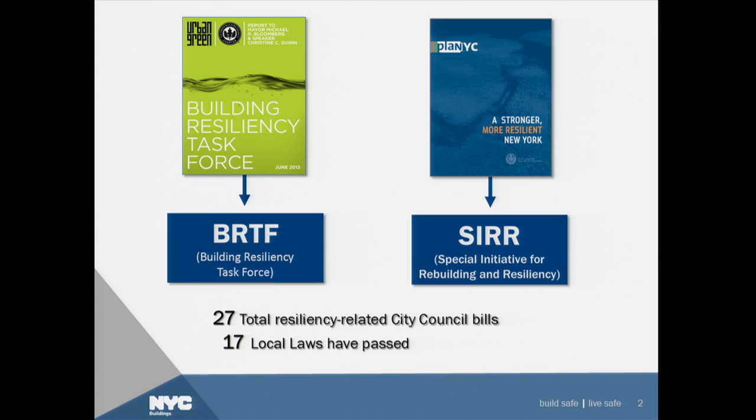So there's a lot of local laws to come, I would assume. There are 27 total resiliency-related city council bills. Of them, 17 local laws have passed. And of those 17, roughly 9 have some impact on Appendix G. So I'm going to be discussing 8 of those local laws.

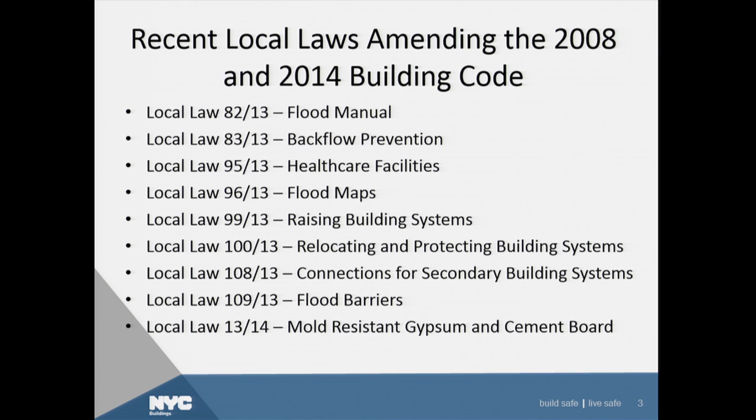Local Law 82 of 13, I'm not going to discuss at length, but just know that the department is required to author a flood manual, which will summarize all of the construction provisions for construction in a special flood hazard area. That's forthcoming.

Local Law 83 of 2013. Now, a lot of these local laws are accentuating provisions that are already in the books. This particular local law is one of them. For construction in a special flood hazard area, it was always required that a backwater valve be provided, but in many instances it was overlooked because there wasn't a specific reference in the plumbing code. So a plumbing designer or a plumber looking in the plumbing code wouldn't know to look to Appendix G or ASCE 24 for specific provisions related to backwater valves.

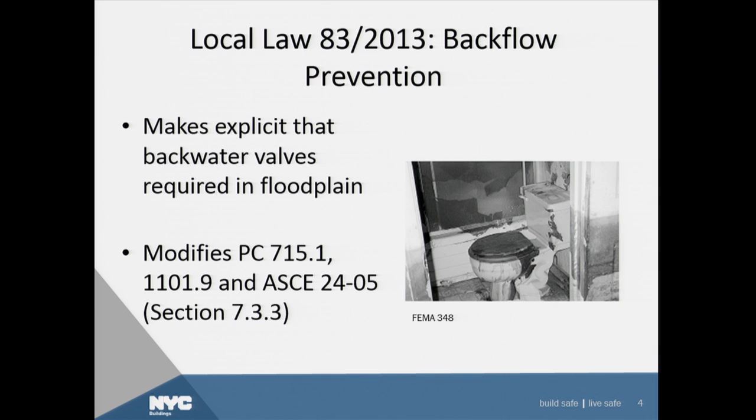So this particular local law makes explicit that backwater valves are required in the floodplain. It also makes explicit that buildings located in a special flood hazard area connected to a public sewer are subject to surcharge—that's the reason for requiring these backwater valves. Also keep in mind that individual private sewage disposal systems are also required to provide backwater valves, so that during a flood event the system won't discharge sewage into the flood waters, and also that flood waters won't make their way back into the building.

Local Law 95 of 13 addresses patient care areas, introducing a new definition of patient care areas for flood zone purposes. That definition defines patient care areas as spaces located within a building or portion thereof classified as Group I2, or spaces primarily used for the provision of medical services to persons—consultation spaces, treatment, evaluation, monitoring. The way it amends Appendix G, it treats these spaces as though they're residential for flood zone purposes, mandating that they be elevated above the design flood elevation. You're not permitted to dry flood-proof these spaces.

There are exceptions to these patient care areas, and the exclusions include emergency departments and spaces with specialized equipment. For obvious reasons, emergency departments you want to have at ground floor so that emergency personnel can deliver persons at ground level. And in many instances, specialized equipment is best suited below grade. So that's the reason for the exclusions.

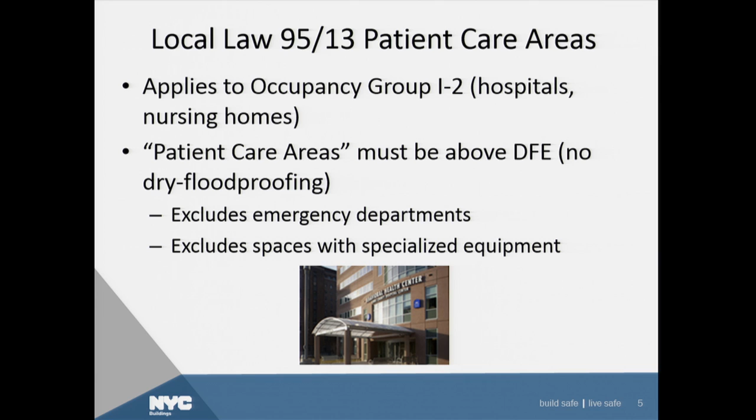Local Law 96 of 13. I know we did a whirlwind tour on the resiliency-related local laws—Gus, myself, and James Colgate—about a month or two ago, where we discussed a lot of these, so this may be redundant for some of you, and I know many of you are already familiar with Local Law 96 of 13, but just to reemphasize this point.

There's been so many different types of mapping products released by FEMA—the advisory maps, the preliminary work maps, now the preliminary flood insurance rate maps. So there's so many questions as to what maps do I use, which ones are applicable to my particular project. This Local Law 96 of 13 adopts the preliminary flood insurance rate maps into Appendix G, making it clear that these maps must be followed when filing a building in the special flood hazard area.

Now, we can't just yet forget about the effective maps from 2007. Until FEMA releases their final version of these preliminary flood insurance rate maps—their effective FIRMs, whatever that may be, effective FIRMs of 2015—we still have to refer to both sets of maps.

Of particular interest for this slide, you can see we're looking at a small portion of a panel. There are roughly 340 flood panels in New York City. This is for an area in Staten Island called Wolfe's Pond. If you look on the left-hand side, the effective FIRMs from 2007 are showing a VE zone in some of the residential neighborhood there, which would require elevating a building on piles. Whereas on the right-hand side, the preliminary flood insurance rate maps from December 5th of 2013 are showing that same area in an AE zone, which would not require a pile-supported foundation.

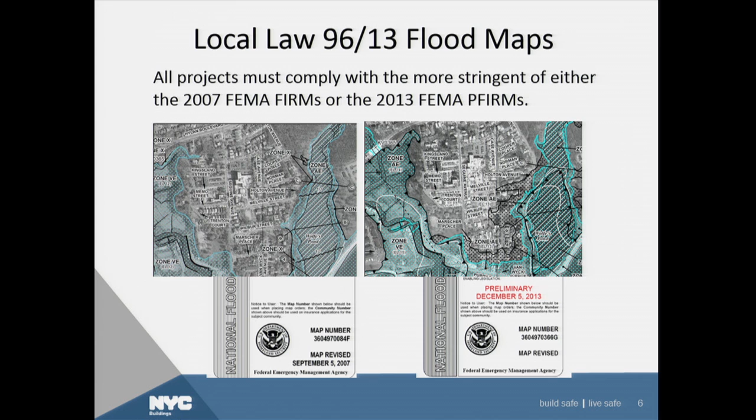Local Law 96 of 2013 also changed the city datum. Previously, the city datum was NGVD of 1929, the National Geodetic Vertical Datum of 1929. Now all elevations must refer to the North American Vertical Datum of 1988. This is consistent with the flood insurance rate maps, and it's effective for new projects submitted on or after January 6th, 2014. Keep in mind this applies regardless of whether your project is located in a special flood hazard area or not. So we've effectively changed the city datum, and it applies to all projects.

Now, if you've previously submitted documents prior to the effective date of this law, and they were in a different datum, you could submit the final surveys or amended surveys in the reference datum that you previously used.

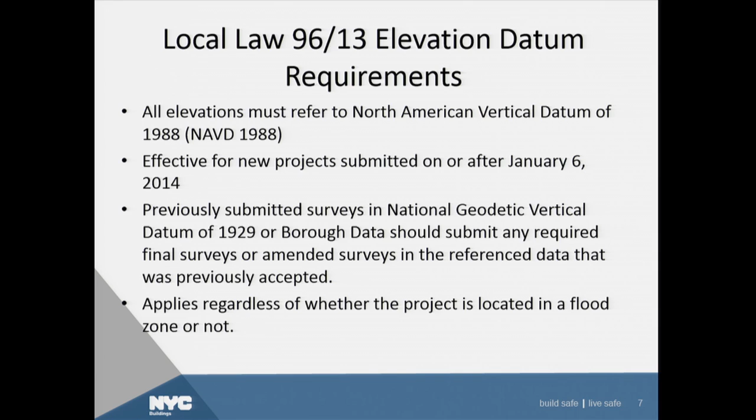Local Law 99 of 2013 deals with cable length and fuel oil storage. Electrical work was always required to comply with ASCE 24 if performed in the special flood hazard area. But electricians looking in the electric code never saw a reference to ASCE 24, Appendix G, or the building code, so they didn't know there were specific provisions. So here we're also making reference in the New York City Electrical Code to make explicit that flood requirements are applicable. They were always applicable, but this local law is amending the electric code to make that clear.

Unlisted entrance cables: this permits unlisted conductive and non-conductive outside plant optical fiber cables entering buildings to exceed 50 feet, to allow direct delivery above the DFE. Keep in mind these particular types of cables are not permitted to be run in ducts or plenums that deliver environmental air.

The fuel oil storage limitation was slightly increased. It now permits 3,000 gallons of fuel storage on the story above the DFE. Previously that was 330 gallons. Now, keep in mind there's a limitation of 1,500 gallons per tank, so you can have 2 tanks of 1,500 gallons, and there are stringent vault requirements for which each one of those tanks must be enclosed in.

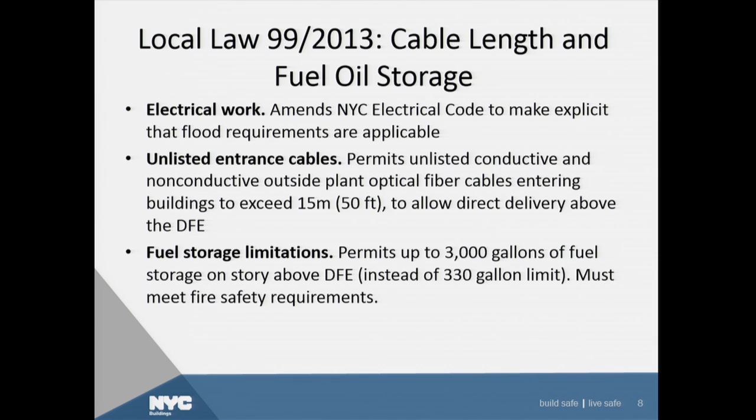This is Local Law 100 of 2013, and it has a fairly significant impact on the location of fire protection equipment. Previously, the practice has been: if you have a dry flood-proof building, non-residential for flood zone purposes is permitted to have dry flood-proof enclosures, and you can locate some of your equipment below the design flood elevation in these dry flood-proof enclosures.

This local law changes that fact, and states that certain fire protection equipment - pumps, electric valves, certain alarm components - must be elevated. Even if you're a non-residential building, these particular pieces of equipment must be elevated above the design flood elevation. Certain storage is no longer permitted within dry flood-proofed enclosures, including medical, compressed or flammable gases, and hazardous materials. They must all be elevated.

Fuel oil fill and vent outlets must be elevated 3 feet above the design flood elevation. Design flood elevation is equal to the base flood elevation plus any required freeboard. So if you were required to have 1 foot of freeboard, this would now be base flood elevation plus 4.

Hospitals, that's I2 occupancy, in the 500-year flood zone must design to the 0.2% flood elevation. So hospitals located in the 500-year flood zone must also comply with the AE standards and be elevated to the 0.2% flood elevation. Or if the hospital is located in an AE zone, they must compare the 100-year flood elevation to the 0.2% flood elevation and use whichever is higher.

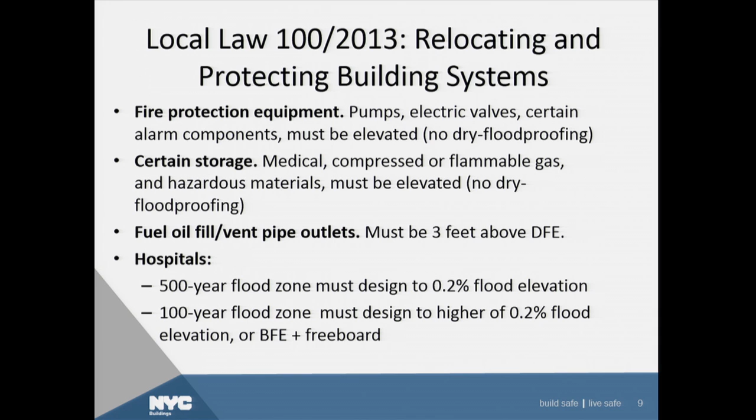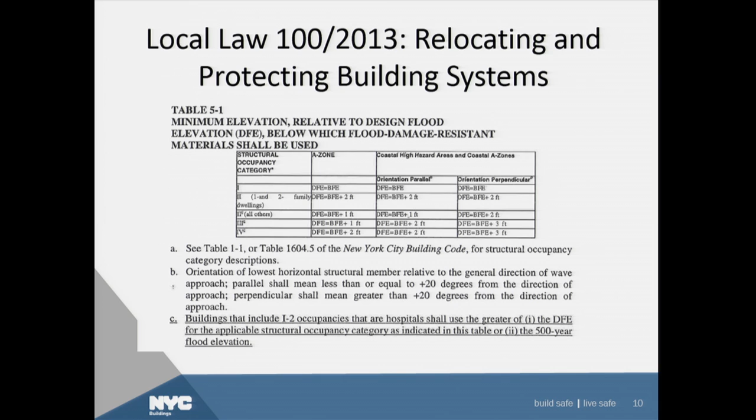Keep in mind this footnote has been added by Local Law 100, and if you look in Local Law 141, you may not see this footnote now, but once the actual building code is printed, you'll see this footnote. I'll make reference to this table again later in the presentation, and you won't see that footnote there - sometimes these local laws don't necessarily show up in Local Law 141.

So this was already mentioned by James Colgate in his presentation. This is a retroactive compliance by 2033 requirement, and it has 2 different compliance paths. One, which he previously mentioned, is using temporary connections to meet the requirements of this local law. And the other, which this particular slide is presenting, is elevating your equipment above the design flood elevation.

For this local law, generators in hospitals must power certain emergency, standby, and heating and cooling loads for 72 hours, and they're permitted to be connected to natural gas, or you can provide temporary connections that will receive power from a temporary generator. I think what we're trying to drive home here is that relocating your generator, which most building owners are going to do because it's a far more resilient measure, is a better idea than providing a temporary connection. However, you can meet the retroactive compliance requirements by simply providing a temporary connection.

For hospitals, it's also necessary that generators and heating and cooling plants must be above the design flood elevation. They're not permitted to be dry flood proofed unless temporary connections are provided. So the temporary connections can be provided, or you're relocating this equipment above the design flood elevation — not permitted to be dry flood proofed for hospitals.

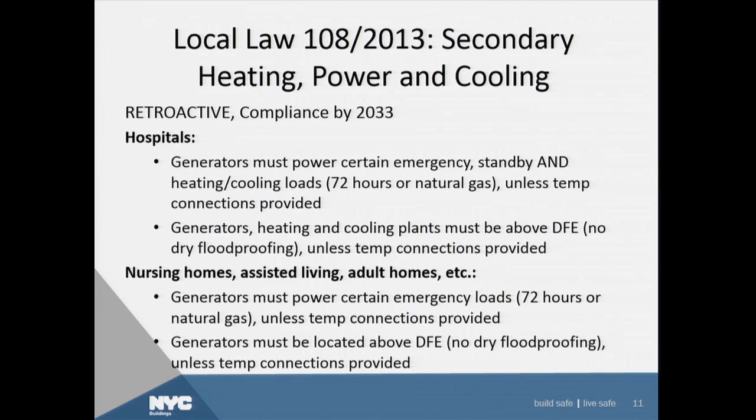Now, for Local Law 109, this clarifies that it's always been a building code requirement that for buildings that are dry flood-proofed, non-residential, for flood zone purposes, when you're deploying shields and gates and blocking means of egress, ASCE 24 requires that you must provide an alternate means of egress for the blocked means of egress.

Now, we've gone a step farther here in New York City, and we've amended ASCE 24's provision to state that every required blocked means of egress must be provided with an alternate means of egress immediately adjacent to that blocked means of egress, which is a significant requirement that's often overlooked during the design phase and has to be dealt with when objections are raised. So this local law clarifies that this blocked required means of egress has to be provided with an alternate means adjacent to and above the DFE.

Now, this local law also permits buildings located in the 100-year floodplain and 500-year floodplain to install footings and supports for temporary flood shields, stairs, and ramps a limited distance beyond the street line. That limited distance is 12 inches. It's not a lot, but it's something. Anything beyond that requires DOT approval, and they're in the process of writing a rule on exactly how revocable consents can be gotten from them.

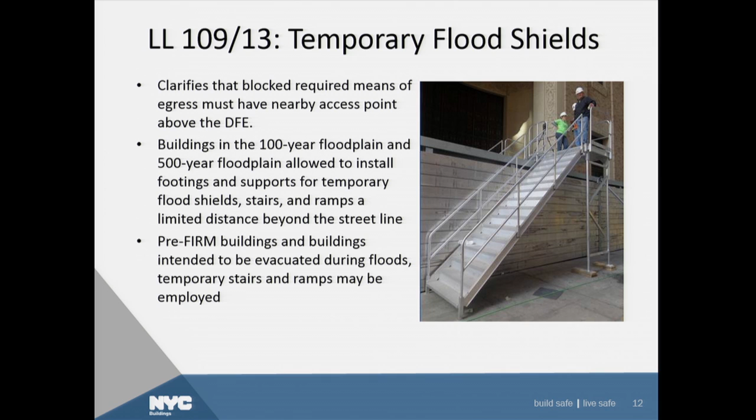Lastly, as far as the local laws are concerned, Local Law 13 of 2014 requires gypsum and cement board installed in basements, cellars, and below ground spaces must be mold resistant. This applies to alterations, as James previously mentioned, to existing buildings as well as new buildings, and that particular mold resistant gypsum and cement board must have a rating of 10 when compared to ASTM D3273.

I just want to check my notes really quickly.

There's a very long list of spaces that are required to comply with this local law. It includes interior faces of exterior walls of basements and cellars, walls and ceilings of rooms containing condensers, water tanks, water pumps, walls and ceilings of laundry rooms, portions of walls within 2 feet of kitchen sinks and stoves, 4 feet above the floor, walls in bathrooms not solely water closets, and walls, ceilings, and service sink closets. So these are all areas subject to moisture and water damage.

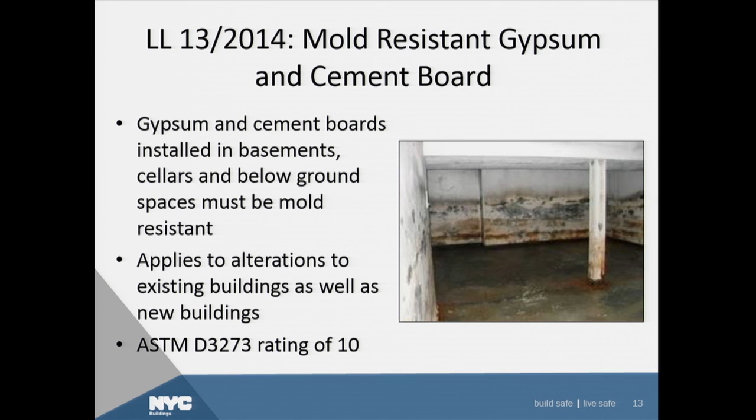There's a long list. I would suggest you take a look and find out exactly where these particular types of materials are required.

Getting into the amendments to Appendix G by Local Law 141, there's a provision in BC G304.1.2, which many of you are aware of if you design buildings in the special flood hazard area. For non-residential buildings permitted to be dry flood proofed, the 2008 code had a restriction on the number of fixture counts within dry flood proof enclosures. This is a New York City specific requirement, and it states that no more than 1 toilet, sink, and 2 compartment laundry tray are permitted to be located within dry flood proofed enclosures.

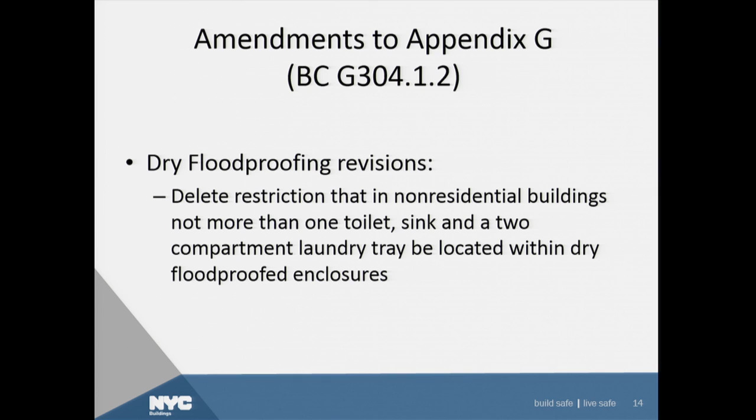So this provision has been removed. The plumbing fixture count is no longer constrained to 1 toilet, sink, and 2 compartment laundry tray within dry flood-proofed enclosures. I think the fear at the time this was added was that dwelling units would be connected to dry flood-proofed enclosures, and we didn't want these spaces to be converted. But it's clear now, based on designs we've seen, that design professionals understand that dry flood-proofed enclosures are not to be connected with dwelling units.

BC G501 is the section that modifies ASCE 24. ASCE 24 is the reference standard for flood-related design and construction. It's a national standard, and I urge you not to just rely on that standard without looking at BC G501, because New York City has made extensive modifications to that reference standard. And in keeping with that, we have made more changes to it.

So this is just a list of the changes to that reference standard from Local Law 141. All of the other local laws I discussed before may or may not have made changes to it, and they'll all be summarized once we get a final version of Local Law 141 printed.

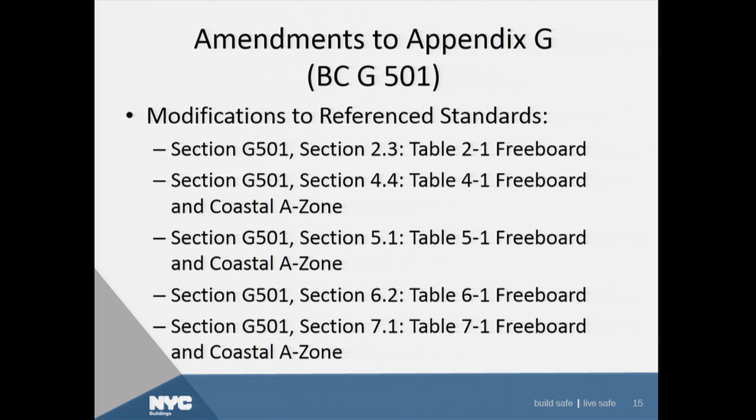So the takeaway here is that all of the tables in ASCE 24 have been amended to incorporate freeboard that was stated or amended by emergency rule 360604, and also to incorporate the new coastal A-zone requirements, which I'll touch on in more detail.

Additionally, you'll notice that for structural occupancy category 2, 1 and 2 family homes and dwellings, this entire row is new, and it includes freeboard of 2 feet. So 1 and 2 family homes are required to be elevated to the base flood elevation plus 2 feet. I think that sort of summarizes the majority of the changes here.

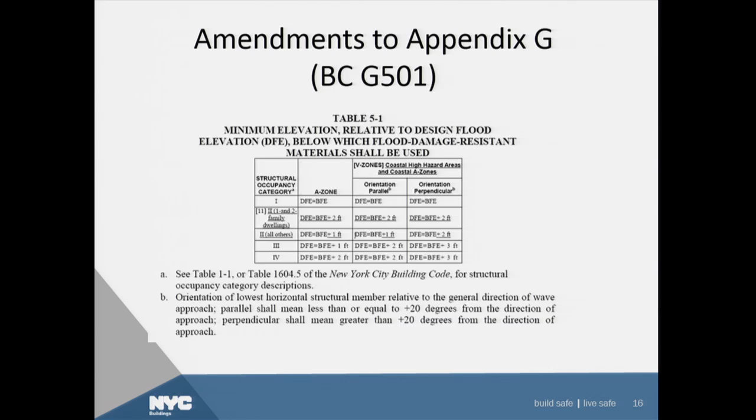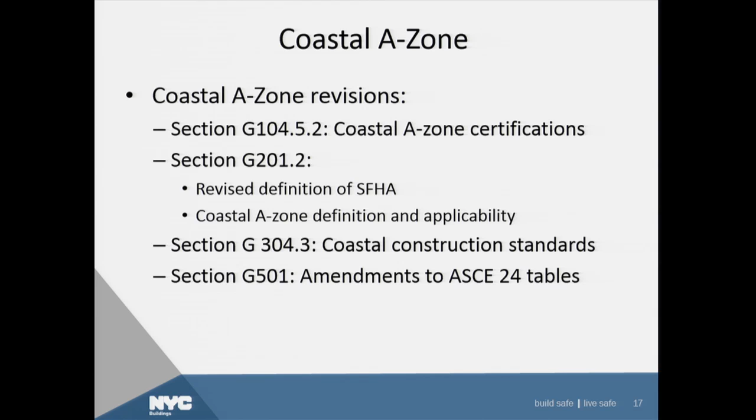There may be more. This slide here summarizes all of the different changes that resulted from the adoption of the coastal A zone. Now, I'm going to talk about all of these different sections at length, so I'll skip this slide.

This illustration here is just to give you a little bit of background on coastal A zones. So the V zone is the area that is furthest from land. It's where the highest waves are. They're coming from the open ocean and making their way towards land. V zones will have wave heights that exceed 3 feet, and they could be as high as 20 feet.

But once they're less than 3 feet, we're transitioning out of the V zone and into the coastal A zone. So coastal A zones will have a wave height between 3 feet and 1.5 feet. And once you transition out of a wave height of 1.5 feet, you're making your way into the A zone, which will have wave heights less than 1.5 feet. This is wave height above the still water depth.

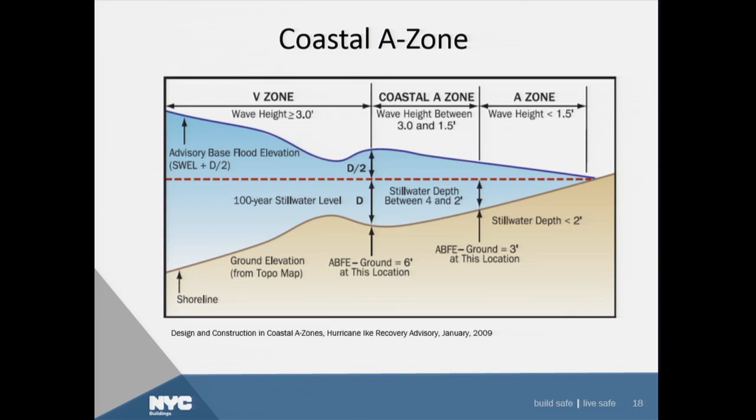I won't read this entire definition of coastal A zones, but ultimately it's saying that a coastal A zone has a wave height between 3 and 1.5 feet, and that the flooding source is a coastal flooding source, not riverine or other types. I really want to accentuate the last sentence, which is in bold, driving home the point that coastal A zones are not immediately an effective requirement here.

It reads that in no case shall an area of special flood hazard be deemed a coastal A zone unless and until it has been identified as such on the adopted FEMA FIRMs, 360497. As many of you know, our effective FIRMs are from 2007.

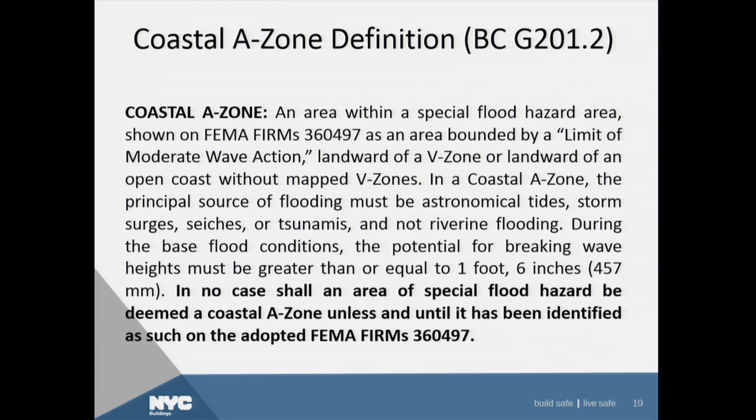We do not have coastal A zones delineated on our effective FIRMs from 2007. Because we don't have effective FIRMs, we only have preliminary FIRMs, we don't have coastal A zones delineated on our FEMA FIRMs. We're expecting our FEMA FIRMs sometime in 2015 that will delineate these coastal A zones, so that's why we've incorporated these provisions into our building code.

That has not happened yet, so this process hasn't started yet, but from the community coordination meeting there's a 90-day appeals period in which landowners can appeal the FEMA maps with scientifically based justification and attempt to get maps revised before they're released. All of the appeals are sent into FEMA.

Once the end of the appeals period has been reached, FEMA is obligated to review all of those appeals, resolve them, and issue the final FIRMs. They issue a letter of determination to the local community, and then roughly 6 months after that we would adopt those maps and they would become effective. So we're obligated to adopt those maps.

It's not optional for us. We're expecting these FIRMs sometime in 2015, it could go plus 6 months, minus 6 months, but I think somewhere around 2015. That would mean that our coastal A zone provisions would kick in once we adopt these maps.

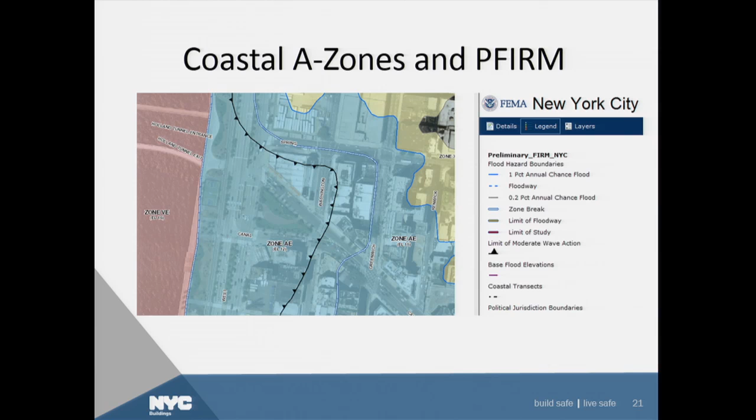The specific requirements are that coastal A zone buildings, any new buildings or substantially improved buildings, substantially damaged buildings, shall comply with V zone construction standards. That's a very significant thing for buildings located in the coastal A zone, V zone construction standards. That's basically going to require pile foundations, and I'll talk about that in a minute, but there are two significant exceptions to this requirement.

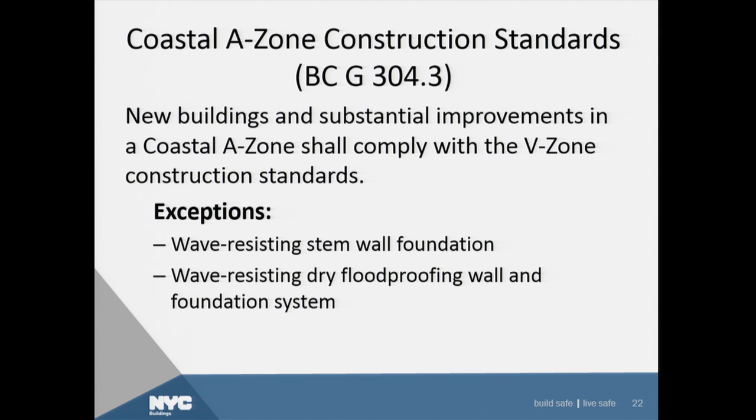One of them is consistent with FEMA's recovery advisories following Hurricane Ike, I believe, that's the wave-resisting stem wall foundation, and the second is the wave-resisting dry flood-proofing wall and foundation system. That's sort of a specific requirement here in New York City, but we thought it prudent and completely acceptable for dry flood-proof buildings to be designed to resist a 3 foot to 1.5 foot high wave.

This is a picture of buildings. On the left-hand side you have a building that's built to V-zone standards, this is typical V-zone construction. Here, the design flood elevation is measured to the lowest horizontal structural member, so design flood elevation would be measured somewhere from in here. And the building on the right-hand side...

...is exhibiting typical damage associated with coastal A zone. This is light frame construction, wood frame construction, slab on grade likely, and those waves just went right through the sheathing and knocked out some of the studs. This is typical for coastal A zone areas, and this Hurricane Ike Recovery Advisory made recommendations that such buildings...

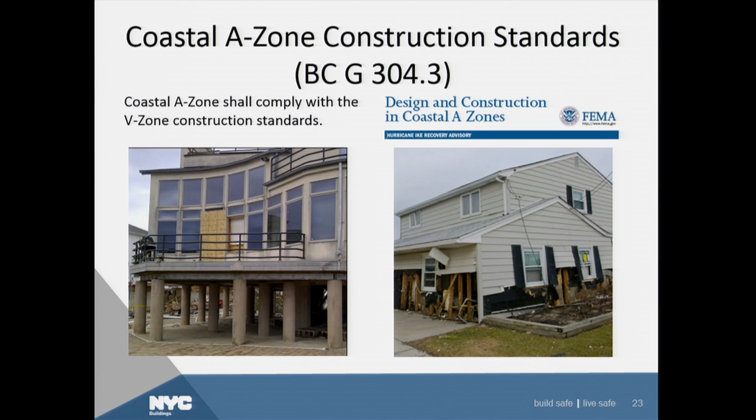...either be constructed to V-zone construction requirements, like the one on the left-hand side, or employ stem wall type construction. So wave-resisting stem wall construction, I'm going to jump between two slides here to illustrate what we're talking about. This particular detail is from FEMA's P550, it contains a lot of the...

...typical details of foundations in coastal high hazard areas, and this is their stem wall construction that we modeled our regulations after. One of the requirements is that the underside of the stem wall foundation system be elevated to the design flood elevation specified in Table 4-1 of ASCE 24. So that's the underside of the floor slab. Typically in AE construction, AE zones, we're measuring from the top of the lowest floor.

Here we're talking about the underside of the lowest floor, so that's something to keep in mind. We've got these tsunami-like blue waves coming crashing into the side of this stem wall. This appears to be a reinforced concrete foundation with a reinforced masonry block stem wall.

A second requirement is that stem walls enclosing areas below the design flood elevation are prohibited. So in the AE zone, you can use the area below the lowest floor for parking, storage, and building access, and it's acceptable to enclose that area in a wet flood-proof enclosure. However, in the coastal A zone, you'll notice this is completely backfilled here with earth.

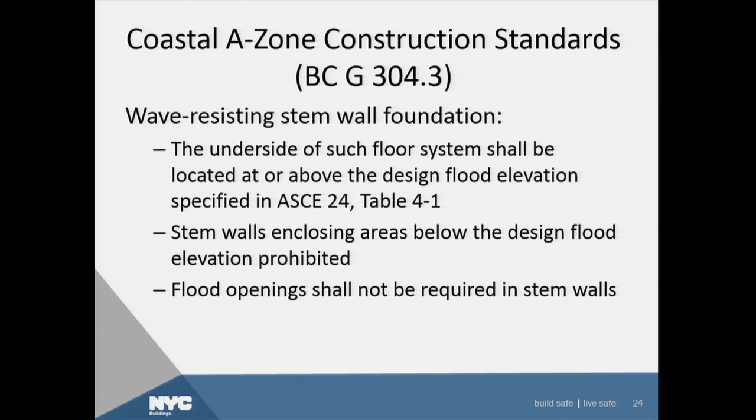It's not possible for anyone to convert that space to anything other than storage of backfill. Additionally, flood openings are not required in stem walls because you're designing for a condition with unequal forces in some cases, where you could have hydrostatic forces on one side and saturated earth on the other side. You're taking this into account when you're doing your design, so it's not mandatory to allow water in to equalize the hydrostatic pressure, as is the case in the AE flood zone.

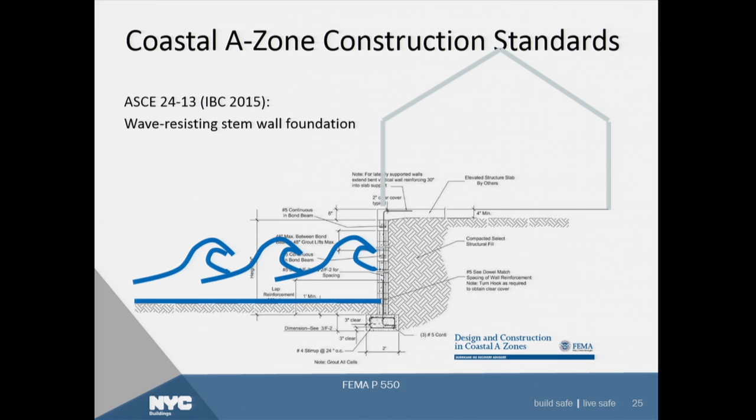So here are a couple of forces that you must design for. ASCE 7 would contain more detail about this. We're talking about wave action, debris impact, erosion, local scour, soil pressure behind the wall, hydrostatic loading, live and dead surcharge loads from the slab above, sliding, uplift, and overturning.

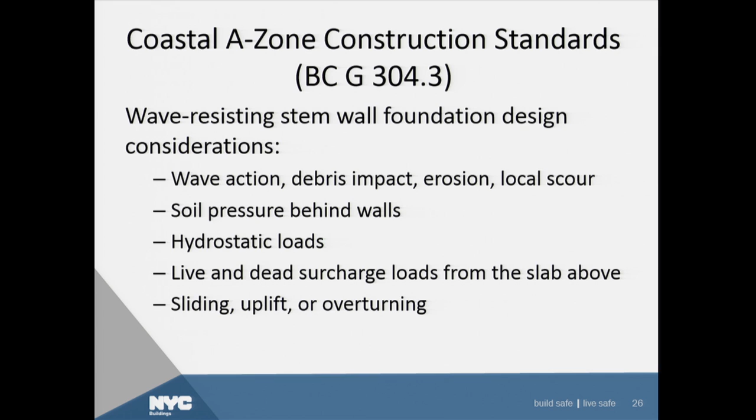Wave-resisting dry floodproofing walls and foundation systems are another exception to the coastal A zone requirements of building to V-zone standards. So if you have a non-residential building for flood zone purposes, you can dry floodproof that building. It's permissible to dry floodproof a building in the coastal A zone, provided you account for the wave impacts on the side of that building, so it's going to be a robust building, likely.

These non-residential buildings, for the most part, have extremely high gravity loads and shouldn't have much issue resisting these waves. But in some cases we've seen little pizza parlors that are non-residential for flood zone purposes, one story, wondering how they're going to comply, and it may not be feasible to dry floodproof such buildings. So keep in mind it's going to require a structural analysis to determine if the building is capable of resisting these loads.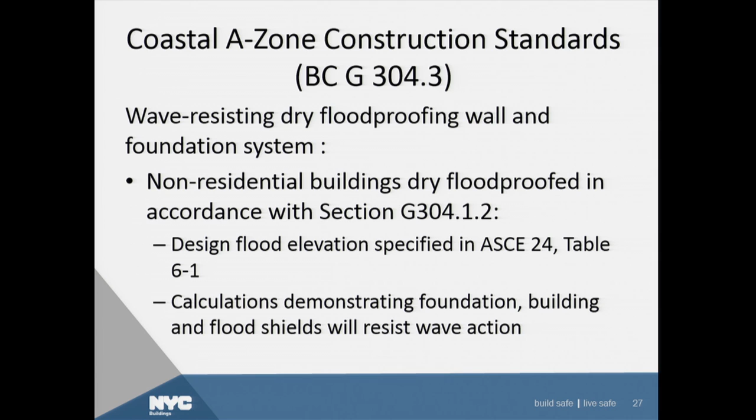So non-residential buildings should be dry floodproofed in accordance with section G304.1.2. The design flood elevation is specified in ASCE 24 table 6-1, and calculations have to be provided that demonstrate the foundation, building, and flood shields will resist wave action.

So there's a lot to consider when you're doing dry flood proofing, and so we always urge that the structural engineer be involved with this particular exercise.

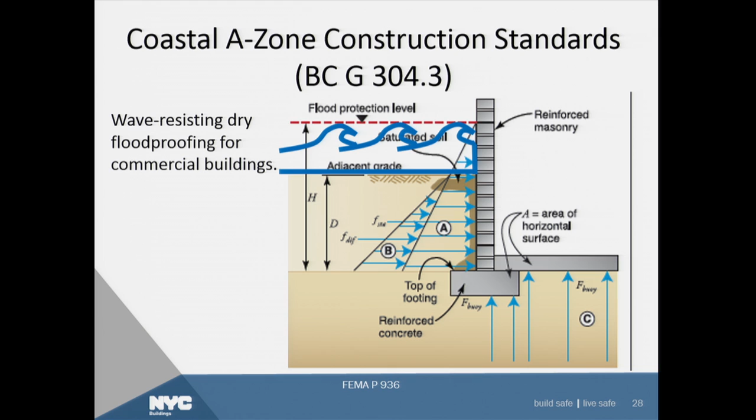Here's a scenario where there was a building that, prior to Hurricane Sandy, was employing flood shields. I can't say they're located in a coastal A zone, but when the MAT team and Department of Buildings staff went through the building and discussed with them what happened during the flood condition, they stated that this building was designed to the design flood elevation with a little bit of freeboard, so they actually went above and beyond the building code.

They had their shields deployed, everything was great, and then they had a wave continually lapping over the side of the shields, and it filled the subgrade parking and everything below grade. I think there were two sub-cellars, and it destroyed all of their boilers and everything they had below grade had to be replaced. That was because these waves just lapped six inches over that shield.

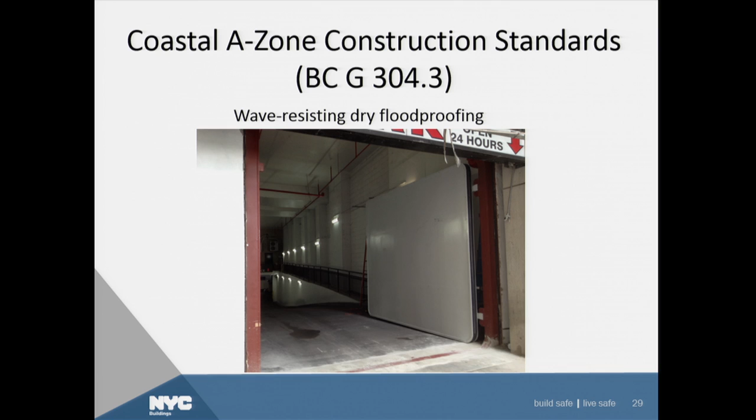So this is their new technique. It's basically a full height door that can be deployed, closed, and I would imagine they could take a 10-foot wave now, but we'll see.

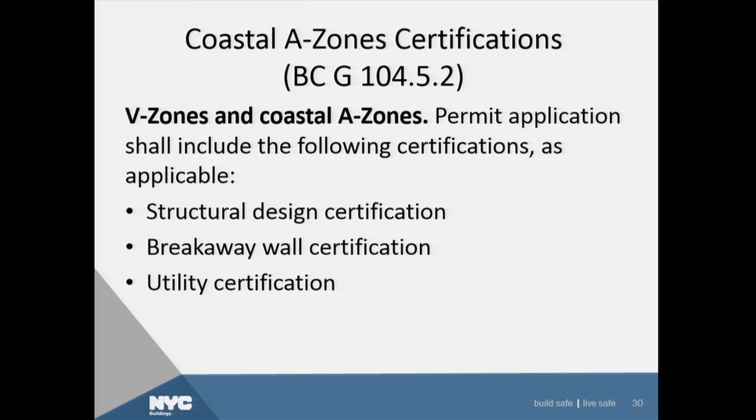V-zone and coastal A-zone permit applications shall include certifications as applicable: structural design certification, breakaway wall certification where built like V-zone, and utility certification. And I think that covers it.